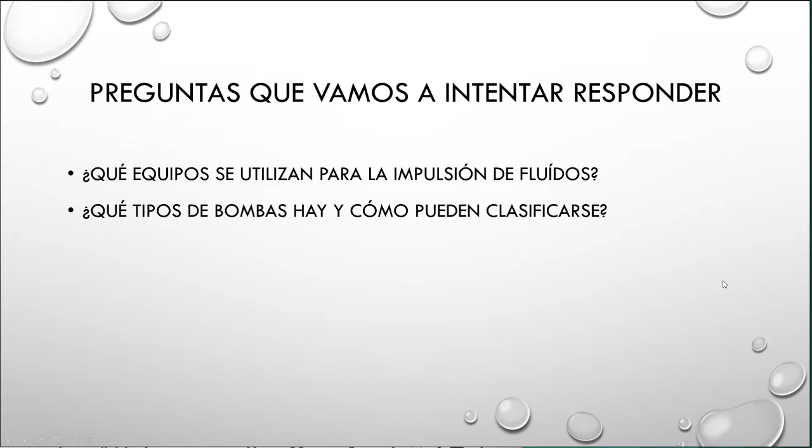La impulsión de fluidos se realiza a través de una bomba, que básicamente es una máquina que absorbe energía mecánica proveniente de un motor eléctrico o térmico y luego la transfiere a un fluido como energía hidráulica, lo que permite que este fluido pueda ser transportado de un lugar a otro, ya sea a distintas presiones manteniendo el mismo nivel, o bien a diferentes niveles o a diferentes velocidades.

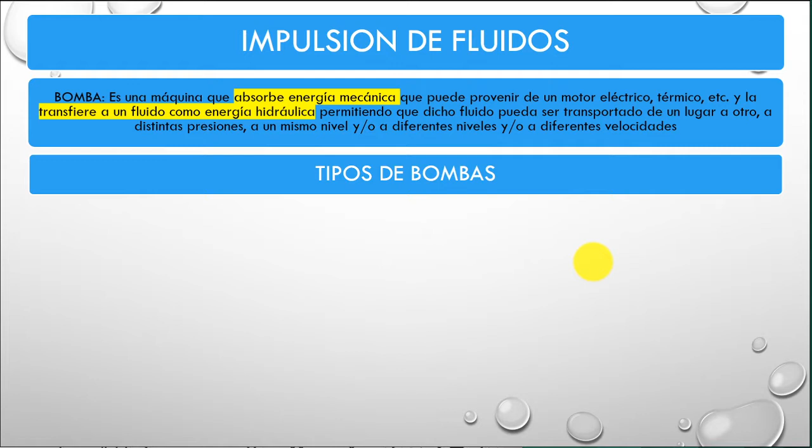Dentro de los tipos de bombas podemos encontrar dos grandes grupos: por un lado las bombas dinámicas, y por otro lado las bombas de tipo desplazamiento positivo. Estas dos grandes clasificaciones de bombas presentan formas de operar completamente distintas.

Por un lado, las bombas dinámicas suministran un caudal que va a depender de la presión de la descarga o de la energía suministrada, mientras que las de desplazamiento positivo entregan un caudal fijo, solamente dependiente de la revolución o las carreras que tenga el equipo. Cuando veamos en detalle el principio de funcionamiento, vamos a entender bien por qué no depende el caudal entregado de la contrapresión en el sistema.

Dentro de las bombas dinámicas tenemos otros dos tipos de bombas de acuerdo a su principio de funcionamiento, que son las bombas centrífugas y las bombas periféricas. Dentro de las de desplazamiento positivo tenemos otros dos grandes grupos: bombas alternativas o bombas rotativas.

Vamos a ver un video donde se describe en detalle el principio de funcionamiento de las bombas centrífugas.

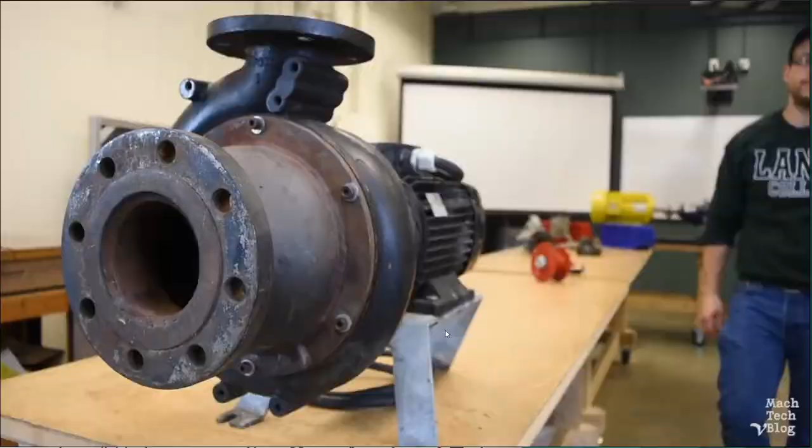Hi, I'm Adam. This is the Mach Tech video blog, and today I'd like to talk a little bit about centrifugal pumps.

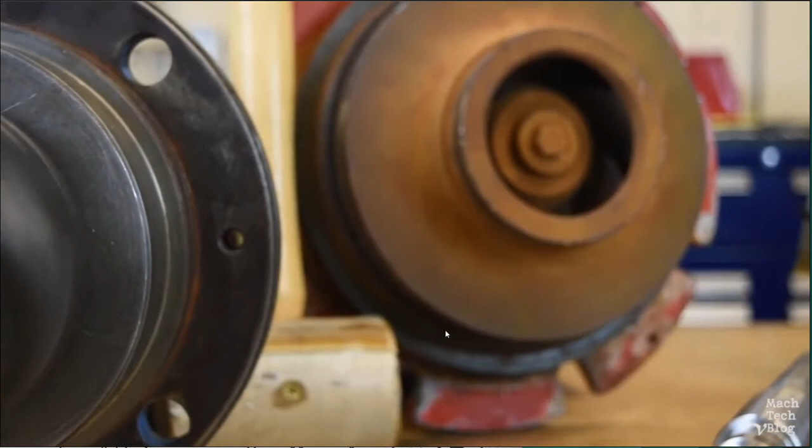Centrifugal pumps are definitely one of the most common machines in the industrial landscape. In fact, they're second in number only to electric motors. And when you consider that electric motors are used to drive centrifugal pumps, it's safe to say that the lion's share of energy usage in the world goes towards pumping fluids with centrifugal pumps. So if you're an industrial maintenance technician, mechanic, or machinist, you'll come across these machines at some point in your career, so it would do you some good to know how they work in the first place.

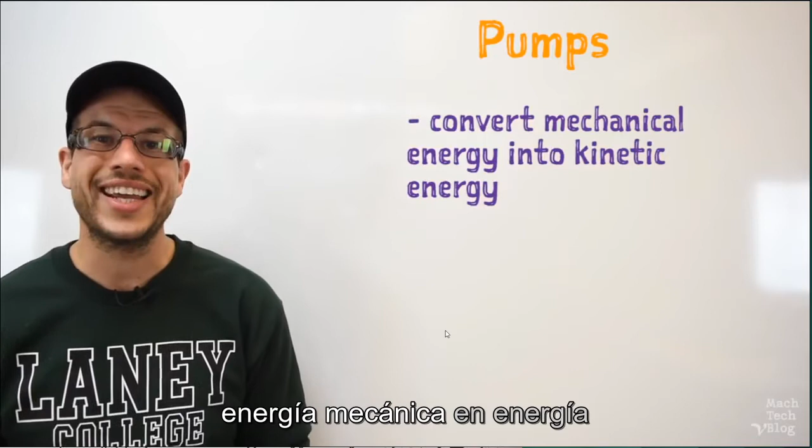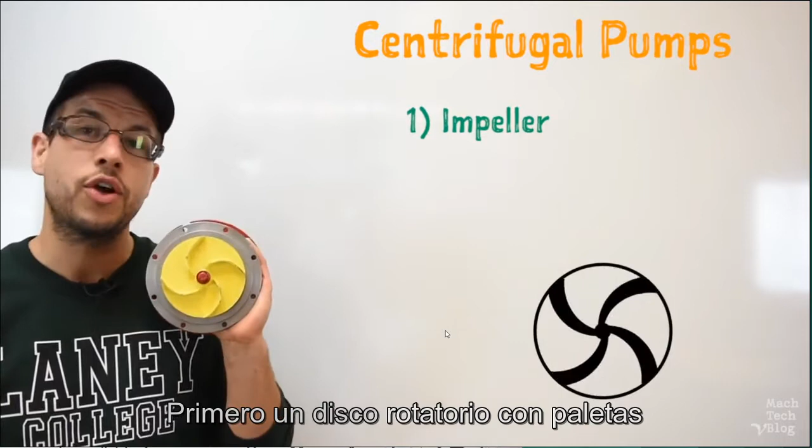In general, a pump is a machine which converts mechanical energy into the kinetic energy of a pumped fluid for the purpose of transporting that fluid from one point to another. But in order to be classified as a centrifugal pump, a pump needs to have two unique components. The first is a rotating disc with curved blade-like vanes on it called an impeller. The second is a specially shaped pipe called a volute casing, which contains the impeller and the pumped fluid.

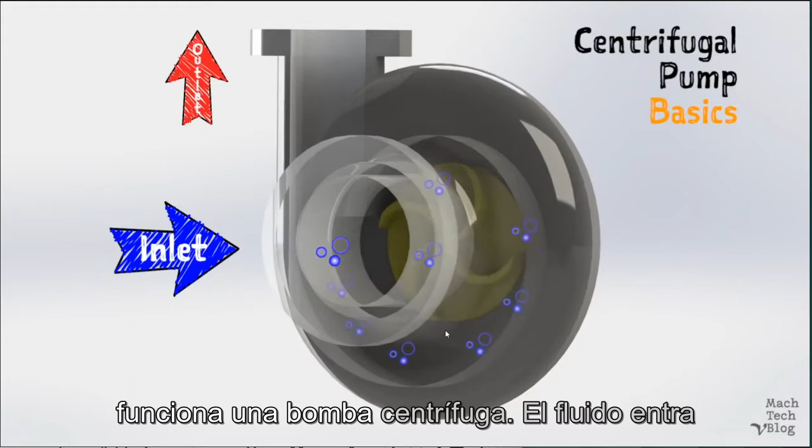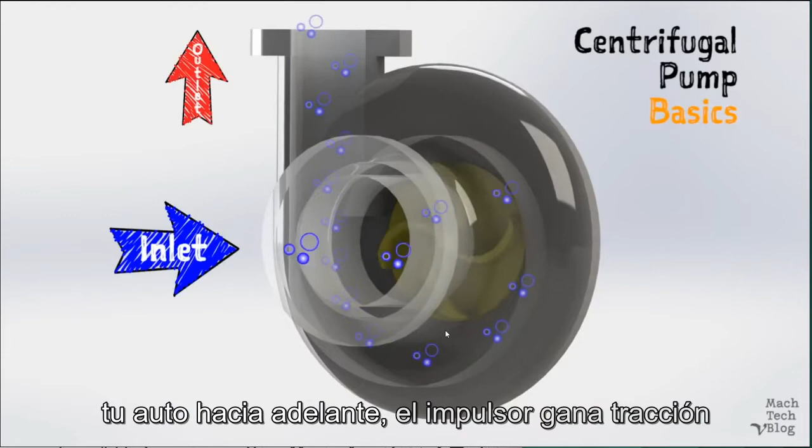In the most basic sense, here's how a centrifugal pump works. Fluid enters the pump at the center of the impeller, called the suction eye. Friction between the fluid and the surface of the rotating impeller causes the fluid to rotate. Think about it like this: just like the friction between the road and the rubber in your tires propels your car forward, the impeller gains traction on the fluid as it spins in contact with it.

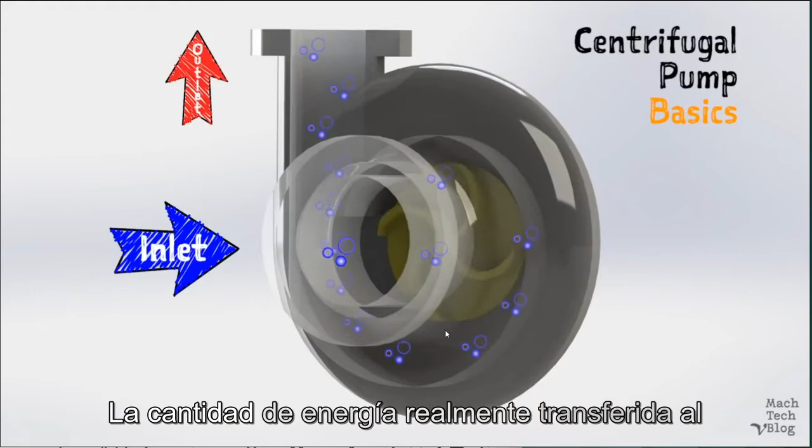The rotating fluid is thrown to the outside of the impeller by centrifugal force, a phenomenon which causes objects revolving around a center point to move away from the center. This is how the fluid picks up kinetic energy from the impeller, and this method of energy transfer by centrifugal force is why these pumps are called centrifugal pumps. The amount of energy actually added to the fluid is dependent on three factors: the density of the fluid itself, the impeller's speed of rotation, and the impeller's diameter.

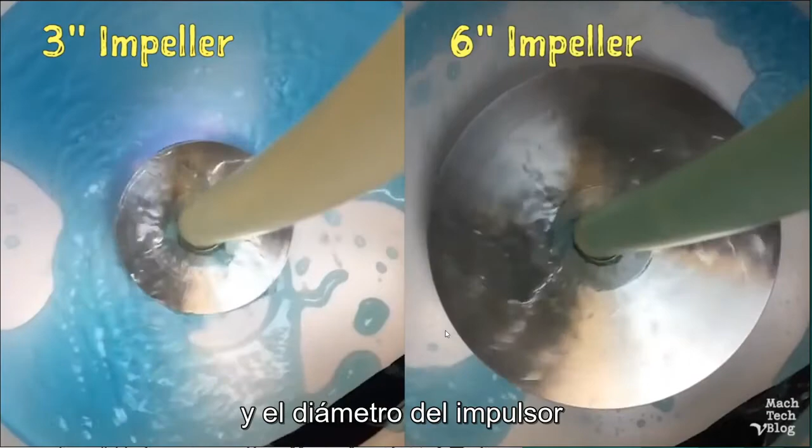From the impeller, the fluid is released into the chamber of the volute casing and directed around to the discharge outlet, and ultimately into the system.

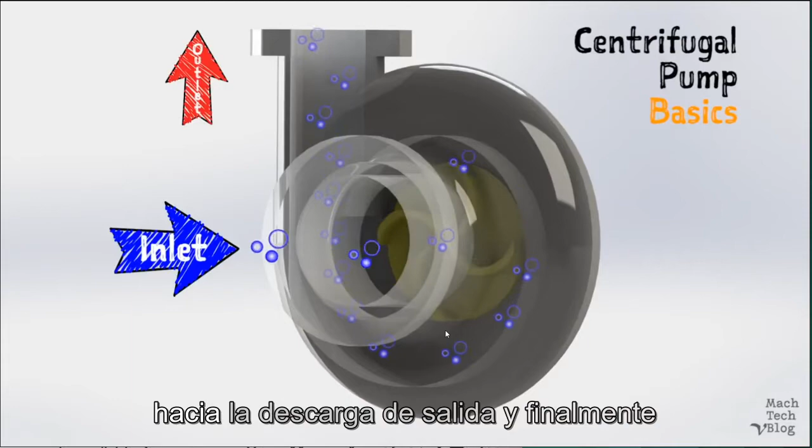Let me take a minute to set the record straight. A very, very common misconception is that these curved vanes help to move fluid by cupping it and pushing it through the pump. So then the correct direction of rotation for this impeller would be clockwise, right?

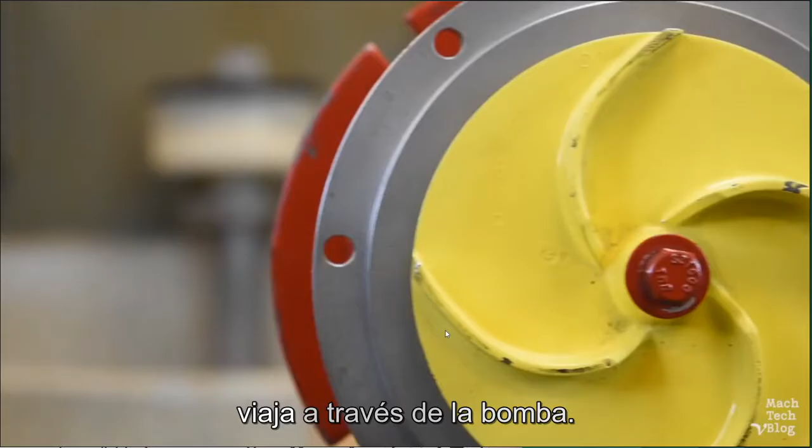That's not really what the vanes are there for. The vane's purpose is to conduct the fluid along the smoothest possible path as it travels through the pump. Backwards curved vanes help stabilize flow conditions at high speeds and reduce demands on the motor.

The correct direction of rotation for this impeller is actually counterclockwise, and you can always tell the correct direction of rotation of an impeller just by looking at the way the vanes are curved. It's important to add that because of the way centrifugal pumps impart energy to fluid, the impeller must always be fully submerged and in direct contact with the pumped fluid.

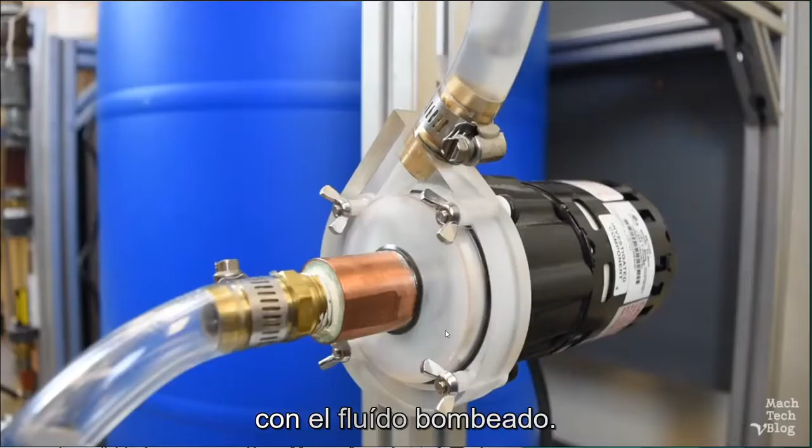As we can see from this little light-duty pump, a centrifugal pump will not pump air and it will not suck fluid through piping like a straw. So before the pump is turned on, the casing must be flooded with fluid, a process known as priming.

And during operation, there must be a sufficient amount of available fluid under positive pressure at the suction inlet of the pump to replace the fluid which is being discharged. This is usually accomplished by placing the pump below the fluid level of the source tank.

If the pump is ever starved of fluid, certainly the pump's performance will be affected, but it's actually more serious than that. It's possible that the pressure at the suction eye of the impeller will drop below the vapor pressure of the pumped fluid. If that happens, then the fluid will effectively boil.

Little bubbles will form, travel partway through the impeller, and then collapse at supersonic speeds like little bullets, taking bits of the impeller along with it. This is a condition known as cavitation, and a pump that's experiencing cavitation is not long for this world.

I know that I use these little water bubbles in my animations to illustrate the fluid path through the pump, but actually, that kind of entrained air or any other gas is the worst case scenario for a centrifugal pump.

Let's talk about the volute casing. Volute refers to the shape of the casing. A volute is a geometric shape defined as a spiral with an ever-increasing radius, like a snail shell.

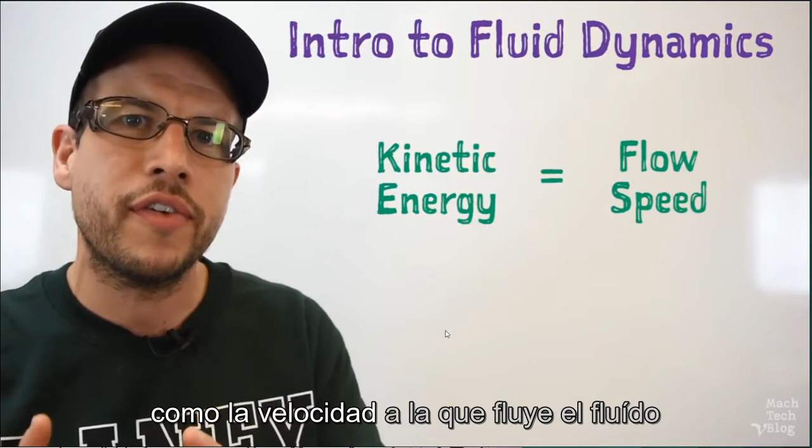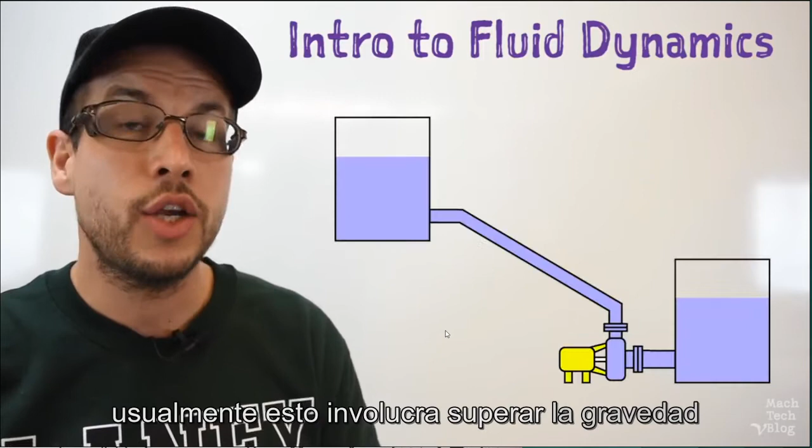But flow speed is only half the equation. A pump also needs to be able to develop sufficient pressure to meet the requirements of the system. Usually this involves overcoming gravity by raising fluid from a lower elevation to a higher elevation and overcoming the resistance or friction of the pipes which conduct the fluid.

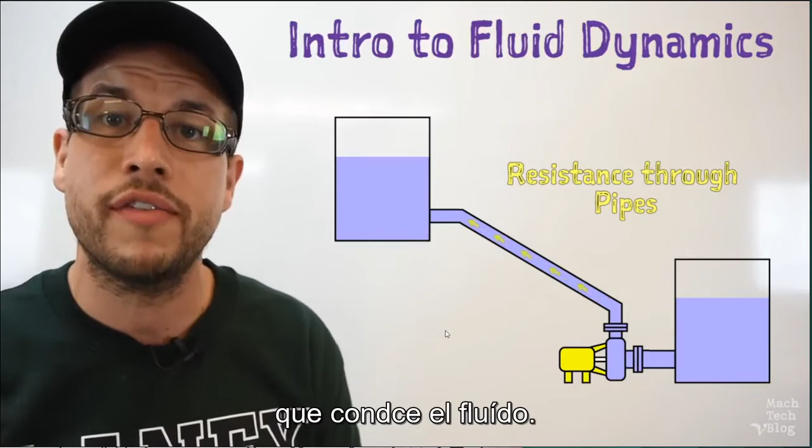Think of pressure as the ability to accomplish a task, and flow speed as how quickly the task can be accomplished. To build pressure, the pump has to do some science magic to convert kinetic energy into pressure energy.

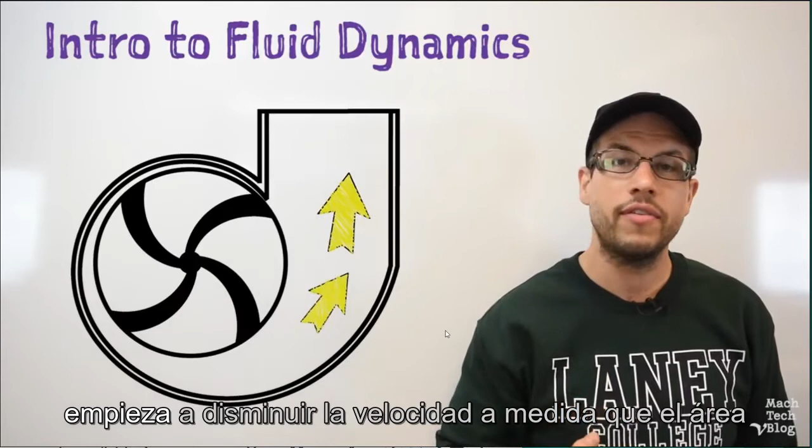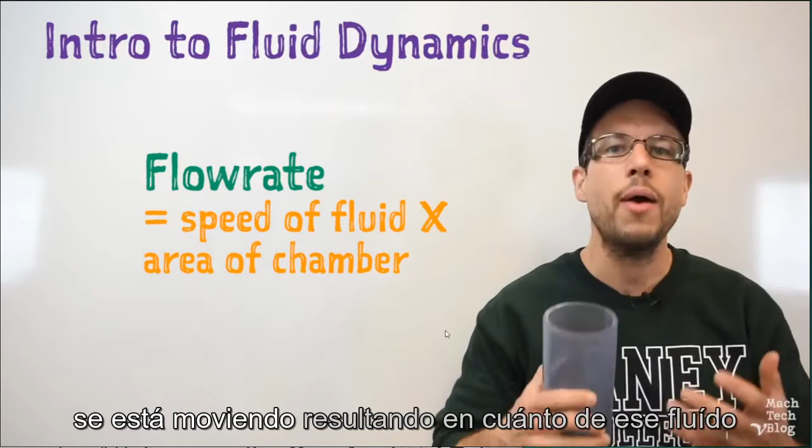As fluid travels through the volute chamber, it actually starts to slow down as the area of the volute chamber increases. That's because flow rate, or the amount of fluid which is moved during a given length of time, is dependent on two factors. One is the speed of the fluid, and the other is the size of the chamber through which it's moving, meaning how much of the fluid is moving at that speed.

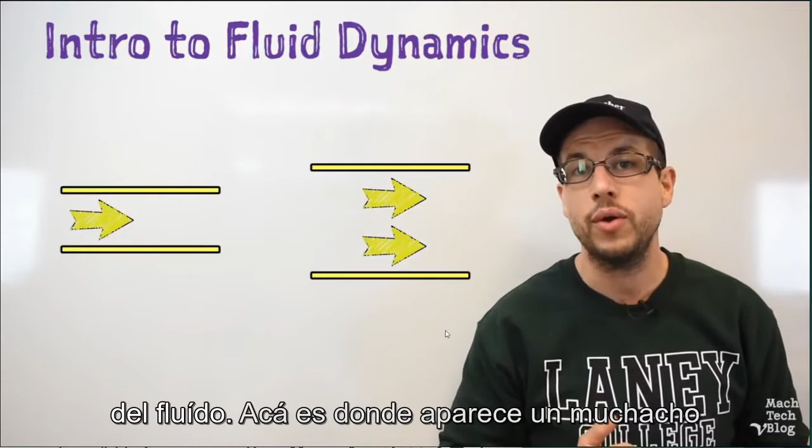If the flow rate is constant, then an increase in the size of the chamber would result in a corresponding decrease in the speed of the fluid. This is where a guy by the name of Daniel Bernoulli comes in.

He discovered 300 years ago that there's an inverse relationship between a fluid's velocity, or speed, and its pressure. Meaning that if the velocity goes up, then the pressure comes down, and if the velocity goes down, then the pressure automatically goes up.

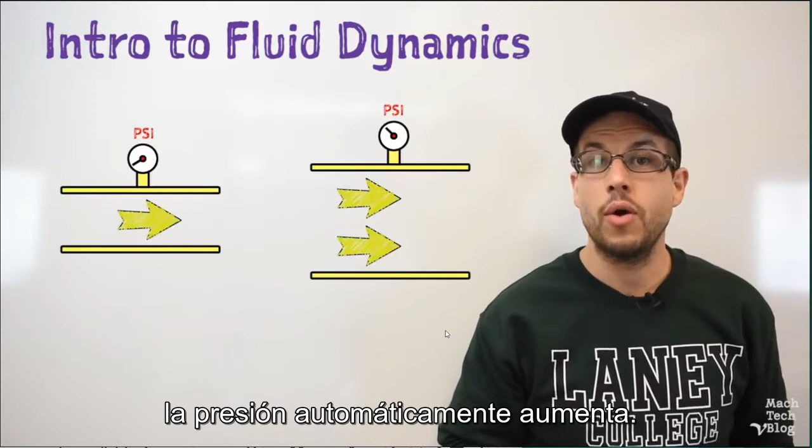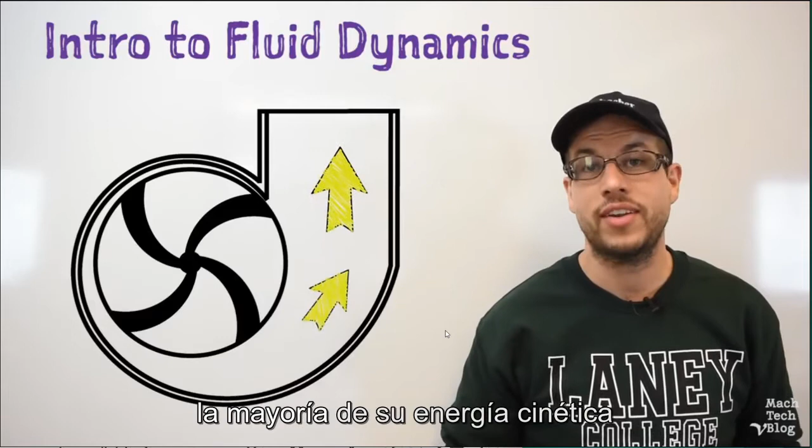So as the fluid is slowing down in the ever-expanding volute chamber, it's also picking up pressure, so that by the time the fluid reaches the discharge outlet, a great deal of its kinetic energy has been transformed into pressure energy. I think that's a pretty amazing little trick.

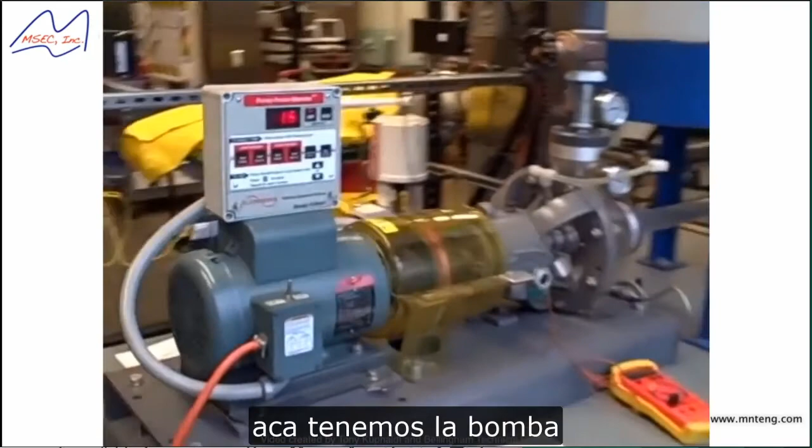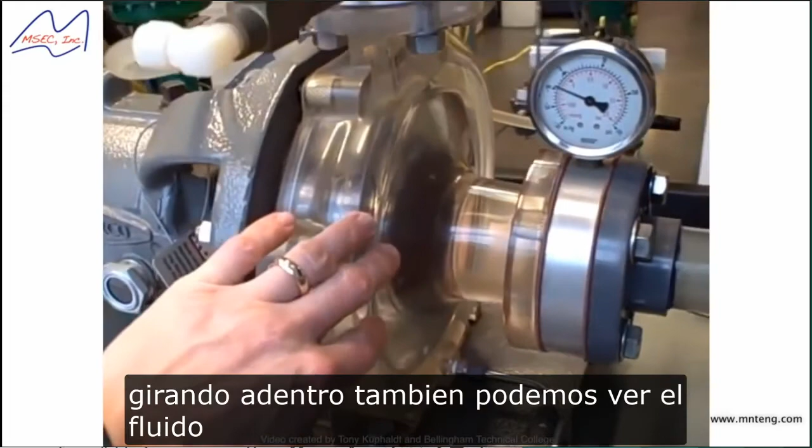Here we have a pump trainer. We have an electric motor with a horsepower meter through a magnetic coupling to a centrifugal pump. The pump itself is made of acrylic, so we can see the spinning impeller inside. We can also see the fluid go through. It's got a gate valve here on the discharge.

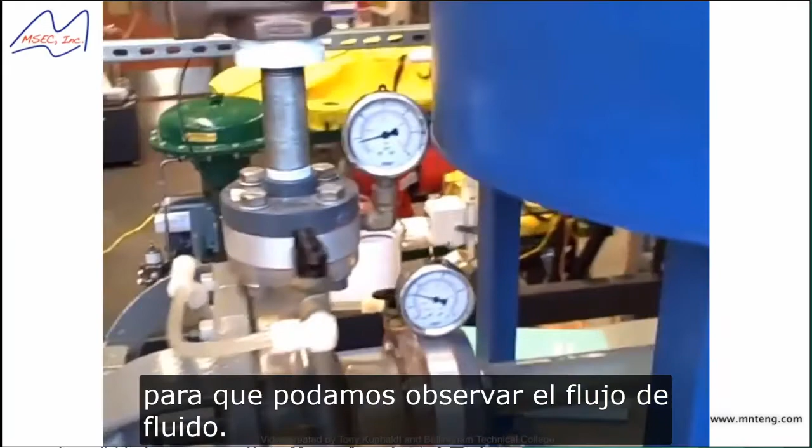It's got another valve over here on the suction, and all the piping here is clear, so we can watch the flow of fluid. Right now it's all clear water, so we can't see much in that regard. It's got a rotameter here showing us the amount of flow. But what I'm going to demonstrate here is cavitation.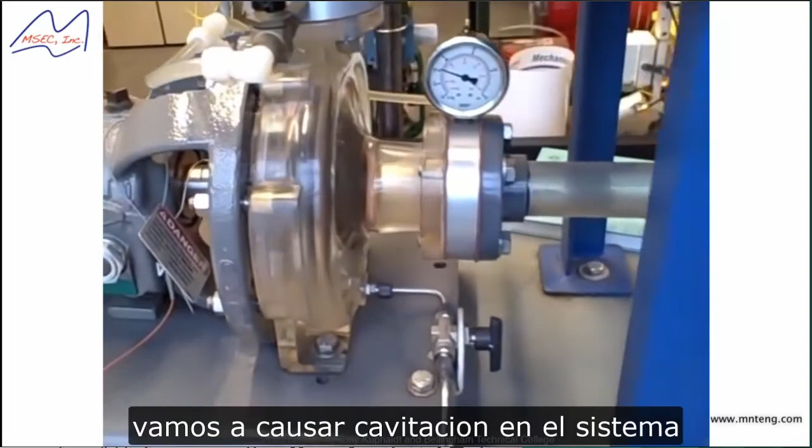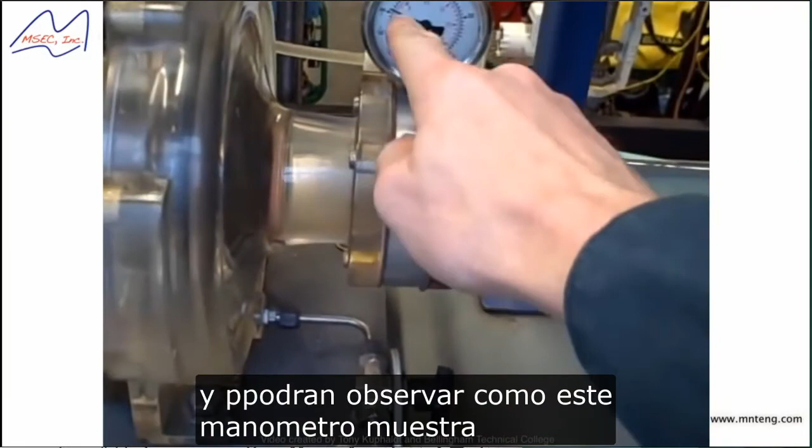We're going to purposely cause cavitation to occur in the system. We're going to do so by keeping the discharge valve wide open like it is and pinching off the suction valve. What that will do is reduce the pressure in this line, and you'll see this compound gauge show a stronger and stronger vacuum as we begin to pinch off this valve.

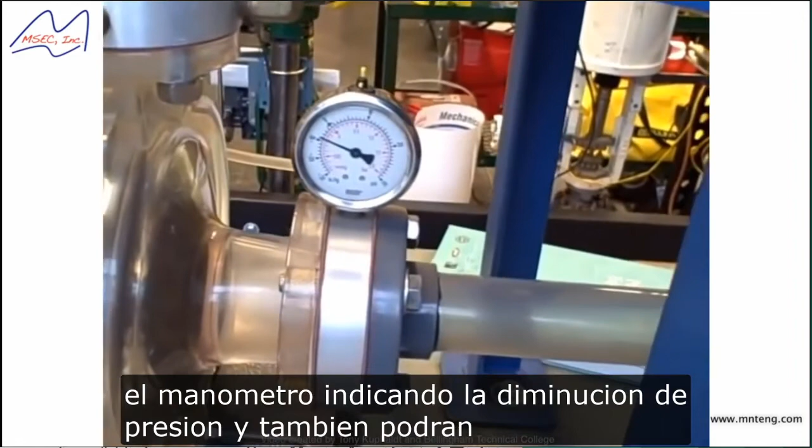Now I'll start to turn this clockwise, and you will see the gauge's indication go down. You'll also begin to hear cavitation take effect, and we'll be able to see the bubbles form inside of here as it cavitates after it flashes into vapor and cavitates into liquid again here. So here we go, closing the valve.

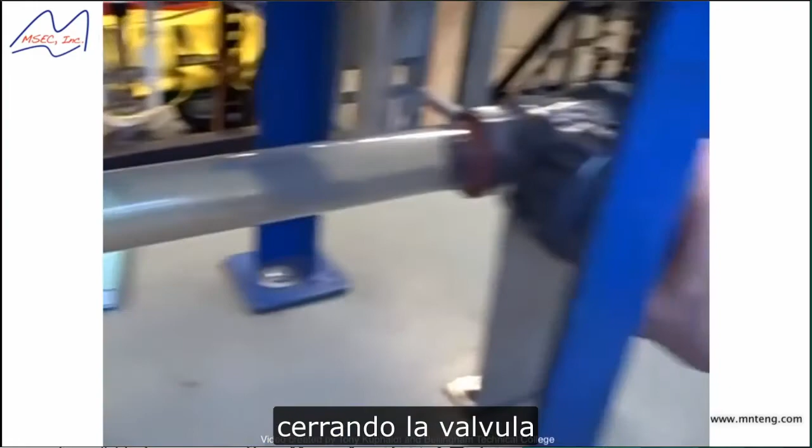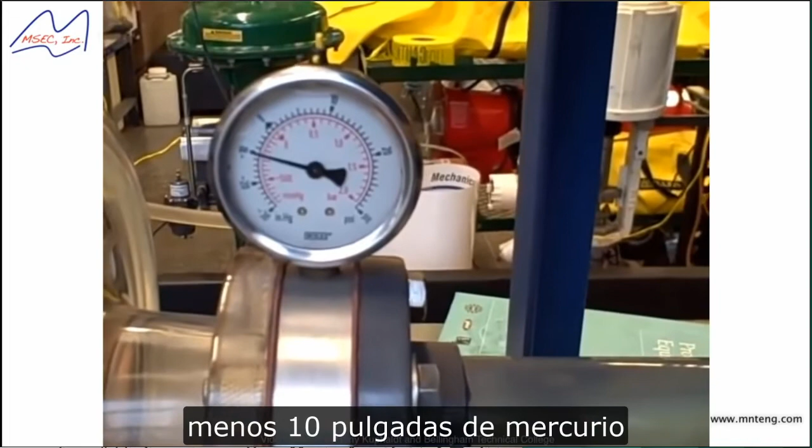And watching the gauge, the gauge will go down. Minus 10 inches of mercury. Minus 12, minus 14, you can start to hear flashing occur there.

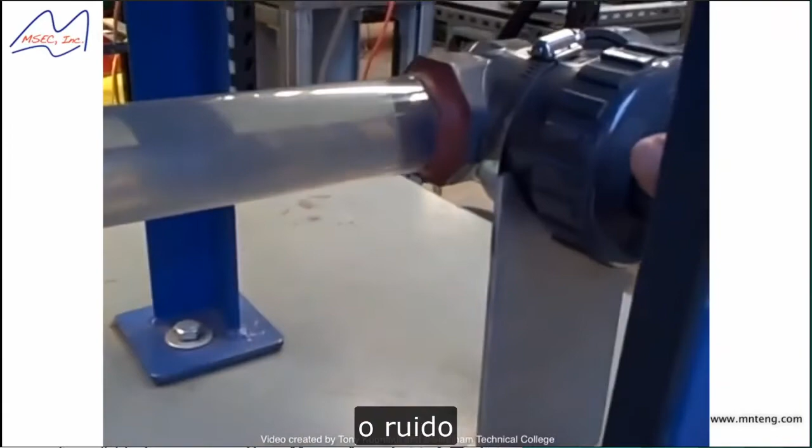Minus 16, more noise. Minus 18, minus 20. You start to hear that sound that sounds almost like rocks going through the pipe.

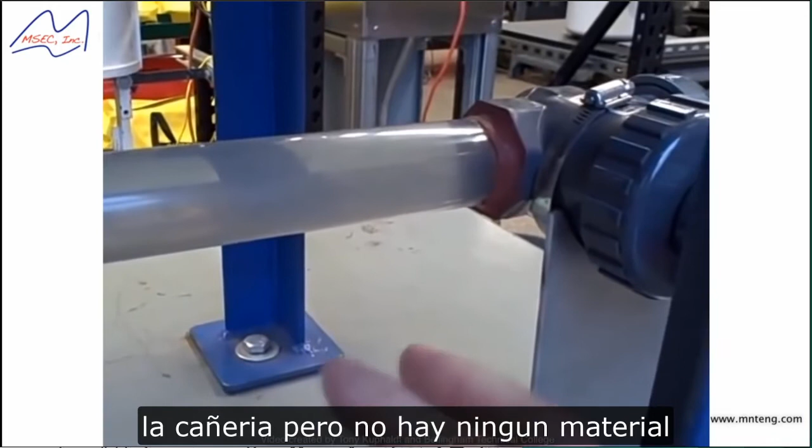There's no debris, there's no solid material through here. That solid sounding sound is really the collapsing of the vapor bubbles as they go back into liquid form. You can really hear it now. You can see it occur inside of here. It's a very pronounced action and noise.

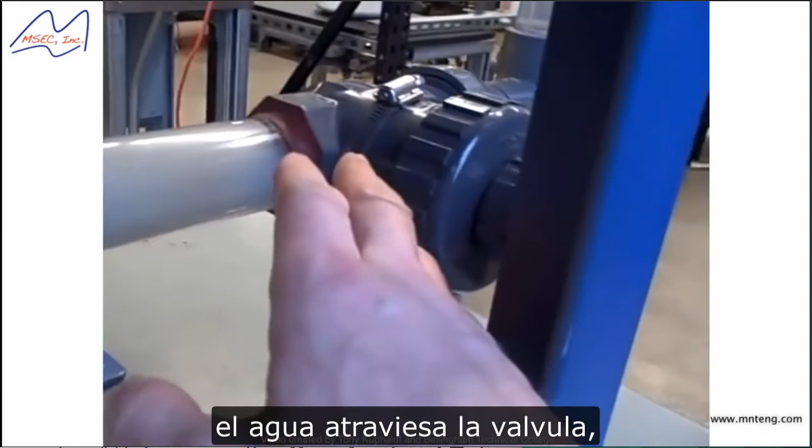As the water goes through the valve, it reduces pressure going through the restricted valve. Its pressure drops below the vapor point of the water at this temperature. It flashes into steam, and then after it comes out of the valve and expands again, the pressure goes up. And what happens is those vapor bubbles collapse back into liquid. And that's when we get the cavitation effect.

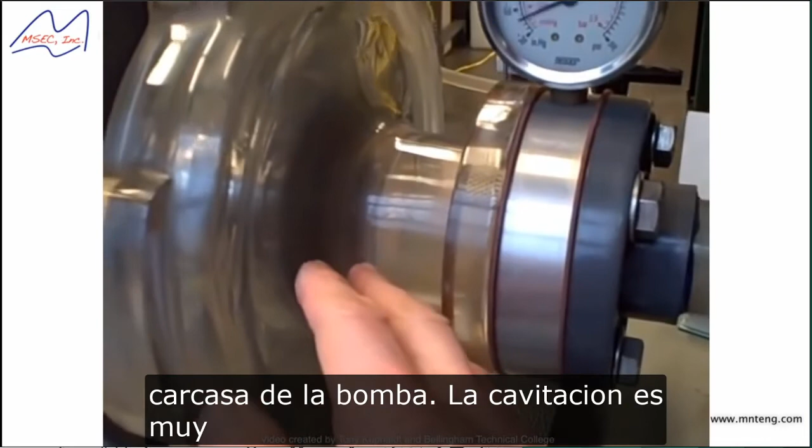See it happening here. We can also see some bubbles here in the scroll casing of the pump. Cavitation is very destructive, especially upon metal surfaces. The acrylic surfaces here seem to handle it a little bit better, but with metal surfaces, there's no give, and it's very destructive. The metal will become pitted by the high pressure jets formed by the collapsing bubbles.

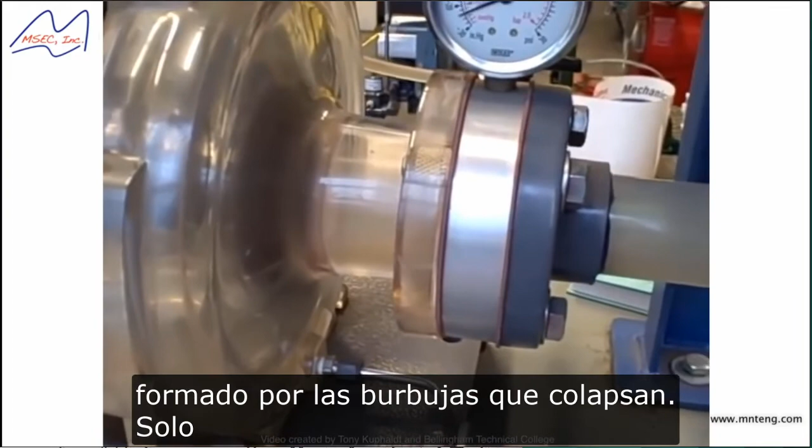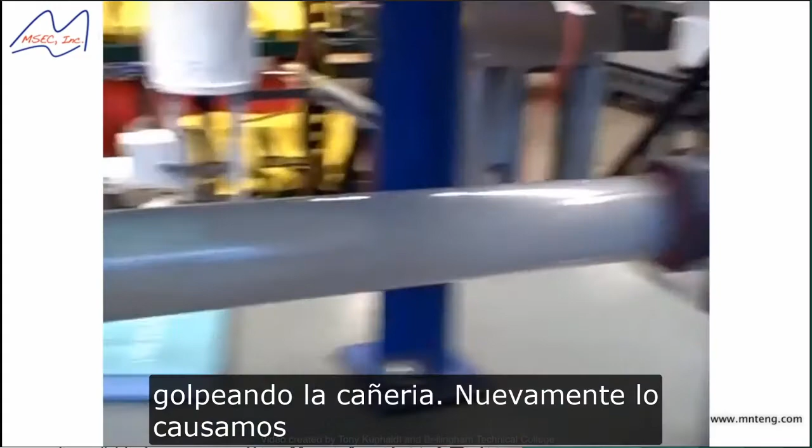So I just want to illustrate what cavitation looks like in an acrylic tube and what it sounds like. It sounds like rocks, literally like rocks going through the pipe. And again, we cause it by dropping too low of a pressure, causing flashing to occur, and when the pressure rises again, the bubbles collapse, and that's when cavitation occurs.

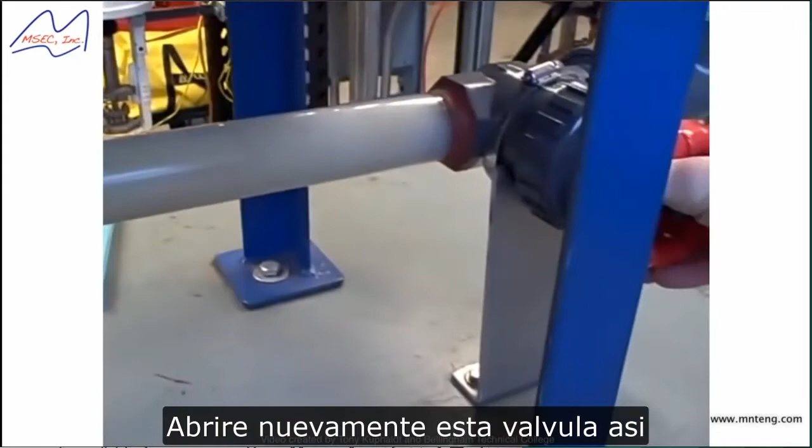I will open this valve back up. That increases the pressure on the suction side of the pump, less and less vacuum, until we no longer flash and we no longer cavitate. And that's a happy pump.

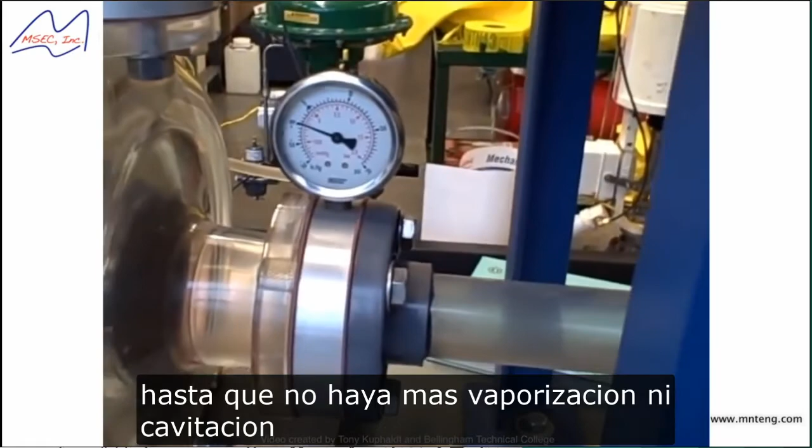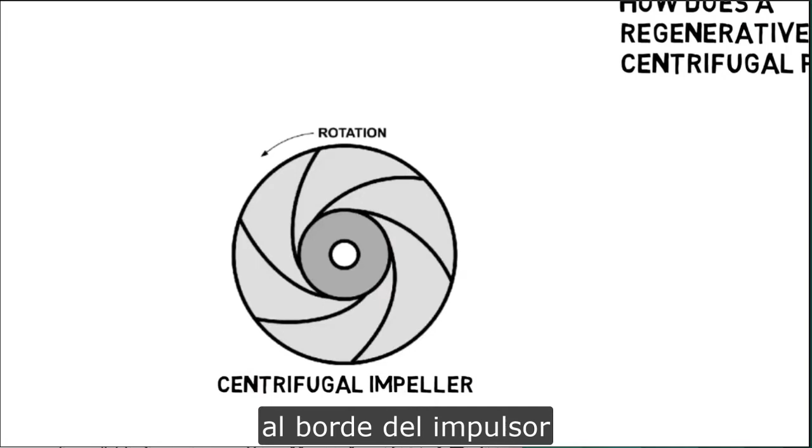The main difference between a regenerative turbine pump and a centrifugal pump is in the impeller. A standard centrifugal impeller has curved vanes that extend from the center to the edge of the impeller. The regenerative turbine impeller has rows of vanes on each side of the impeller's rim.

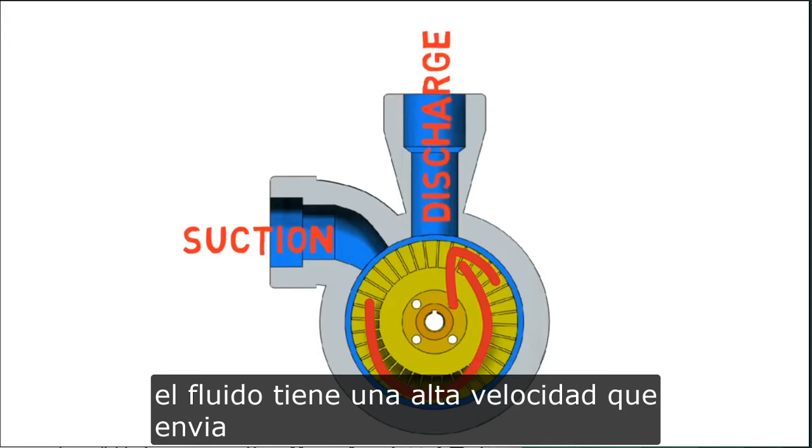On the suction side, liquid is gathered by the impeller's vanes. After making only one revolution in the annular channel, the fluid has a high velocity that sends the liquid out the discharge. Liquid entering a centrifugal pump's impeller can pass between the vanes only once. Energy is added to the liquid as it travels from the center of the impeller to the rim.

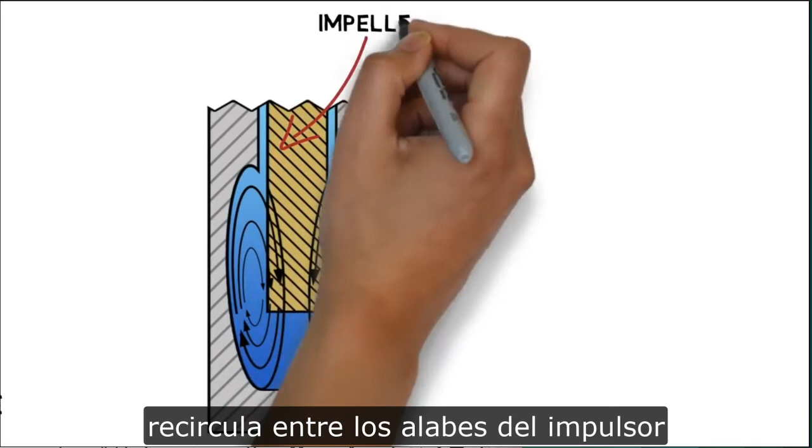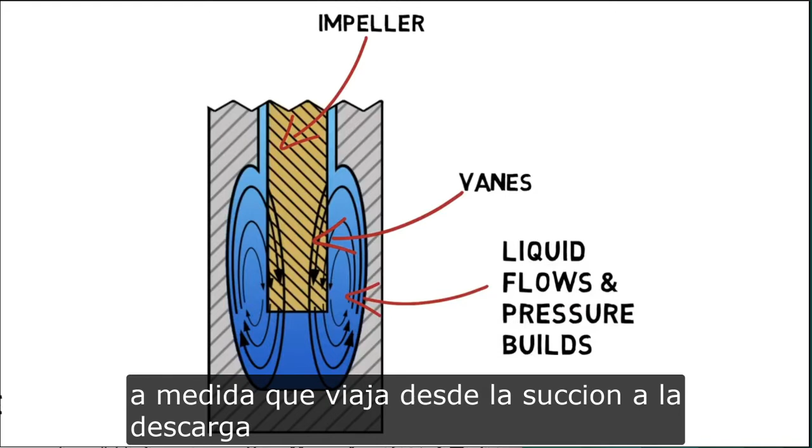In a regenerative turbine pump, liquid recirculates between the impeller's vanes. This helical action carries the liquid forward. Energy is added to the liquid in a number of impulses by the impeller's vanes as it travels from suction to discharge as the liquid builds pressure.

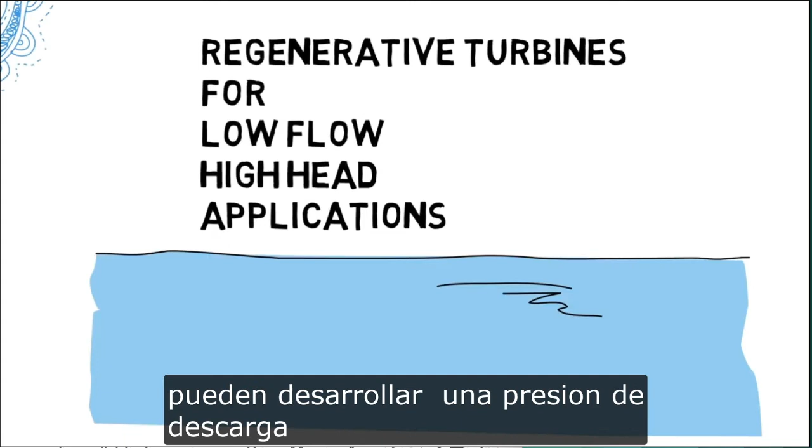For low-flow, high-head applications, regenerative turbine pumps offer better efficiency than centrifugal pumps and can develop several times the discharge pressure of a centrifugal pump having an equally sized impeller.

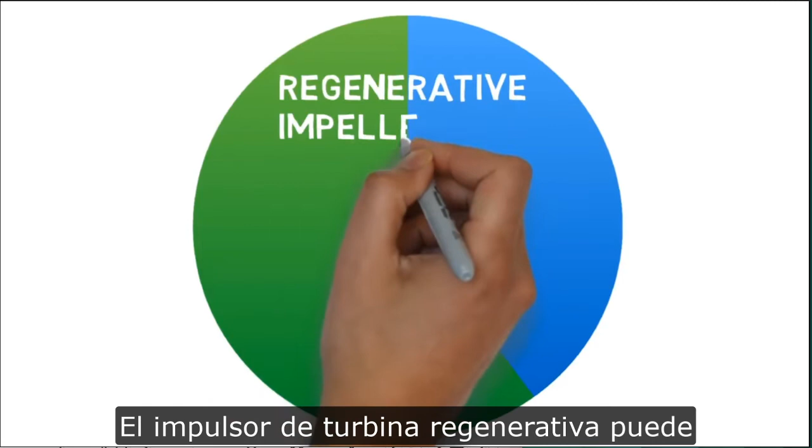The regenerative turbine impeller can pump fluid with up to 20% entrained gases without damage from cavitation or any performance loss.

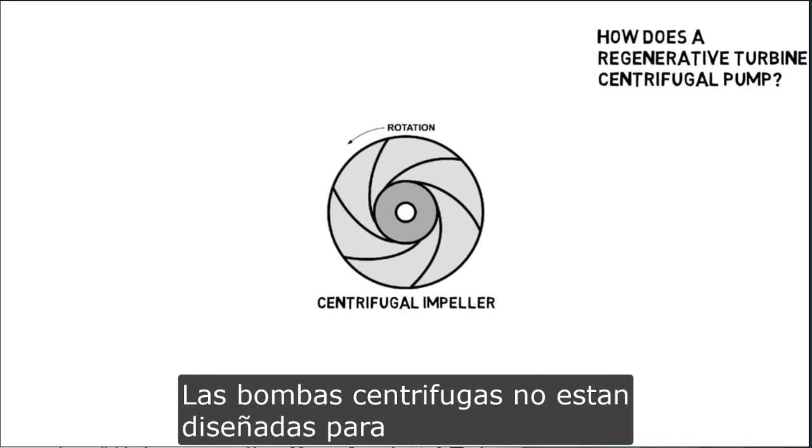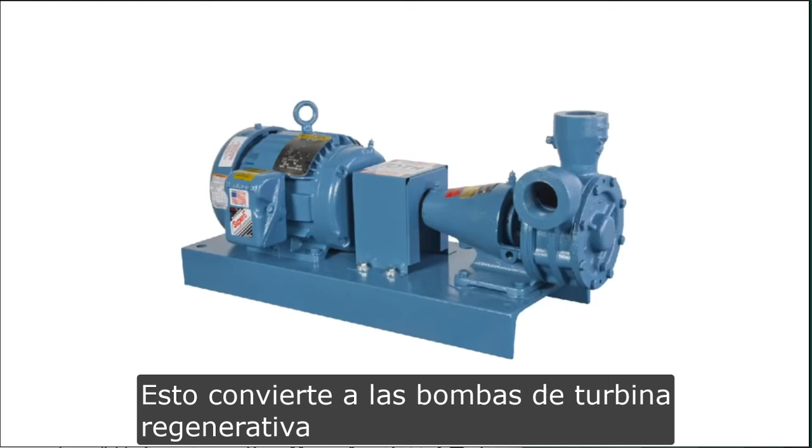Centrifugal pumps are not designed to handle gas in a liquid. Gas in a centrifugal pump can create a significant loss in performance, causing fluctuating flow, discharge pressure, and unnecessary wear and vibration of the centrifugal pump's internal components. This makes a regenerative turbine pump a great solution where cavitation is a concern.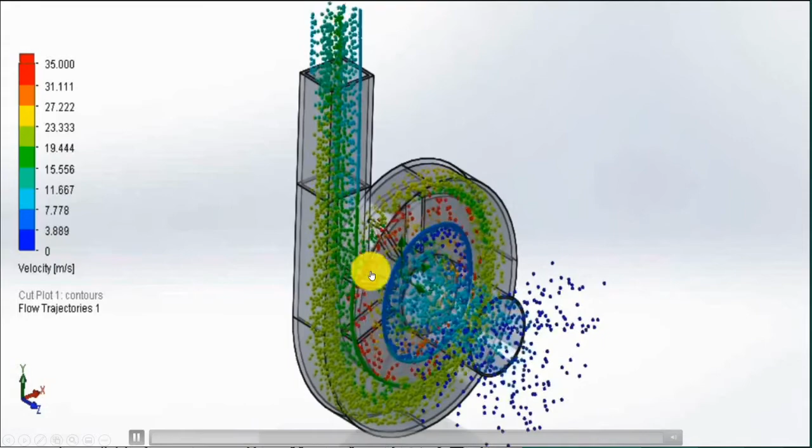Acá se ve mejor el recorrido, acá desde otro corte de la bomba. El fluido ingresa lentamente al ojo del impulsor, luego es acelerado y luego nuevamente frenado por el cambio de sección en la caja voluta para transformar toda la energía cinética en energía de presión.

En cambio, en este video vamos a ver las líneas de corriente dentro de una bomba periférica. Observar que el comportamiento es totalmente distinto. En principio acá no se ingresa por el ojo del impulsor, sino que directamente el fluido ingresa por la periferia y la velocidad es continuamente creciente. Ingresa con la mínima velocidad y a medida que es acelerado por ese impulsor girando a altas velocidades y generando turbulencia, toda la forma de transmitir energía es a través de la aceleración del fluido por la turbulencia generada.

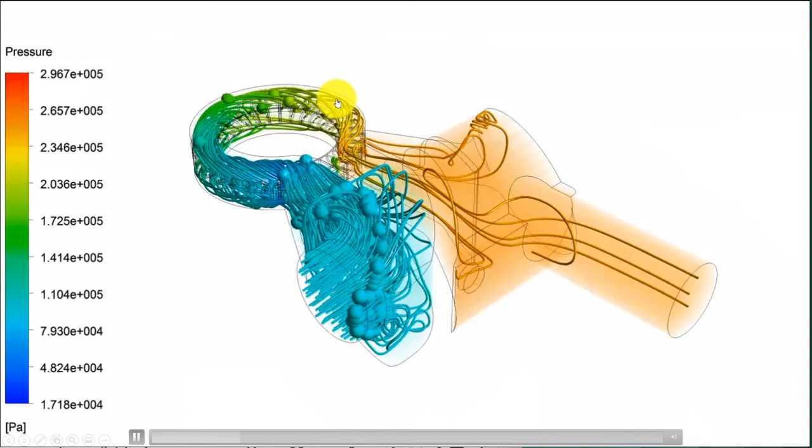Por último, para completar el cuadro, nos queda describir las diferencias entre los dos grandes grupos de bombas de desplazamiento positivo, las alternativas y las rotativas. Por su parte, las bombas de desplazamiento positivo de tipo alternativas utilizan una serie de elementos de volumen que se expanden y contraen, complementados por válvulas de retención que permiten la admisión y el egreso del fluido.

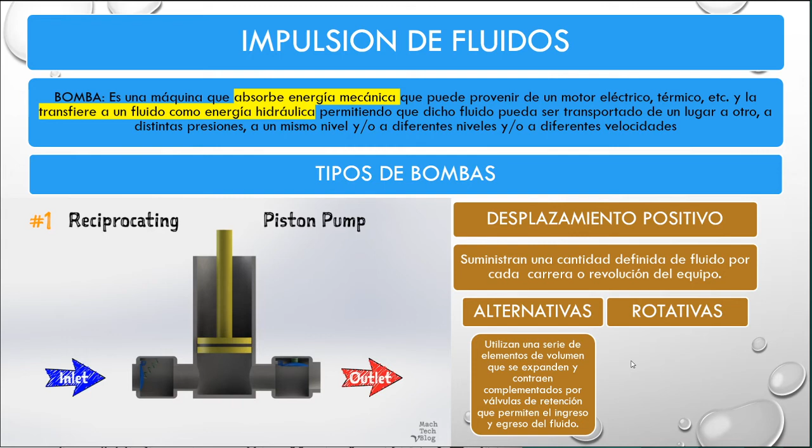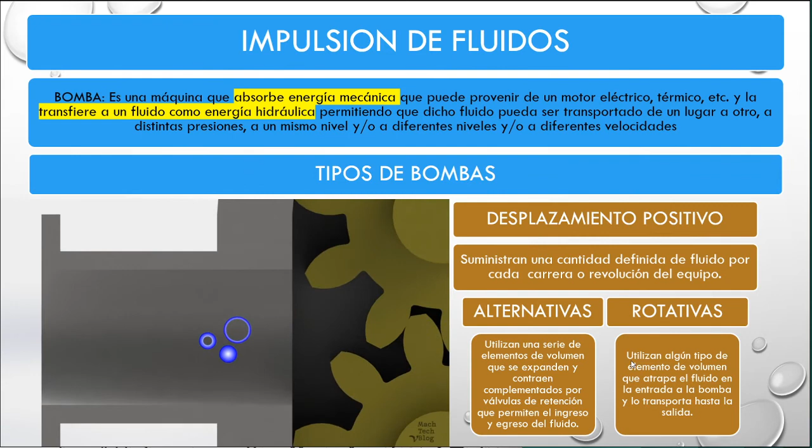Van a ser, imagínense, como una especie de émbolo de una jeringa, que al expandirse a través de una serie de válvulas permiten el ingreso y luego al contraerse expulsan el fluido en la descarga. Por su parte, las bombas de desplazamiento positivo de tipo rotativas lo que hacen es utilizar algún tipo de elemento de volumen que permite atrapar el fluido en la entrada y transportarlo hasta la salida.

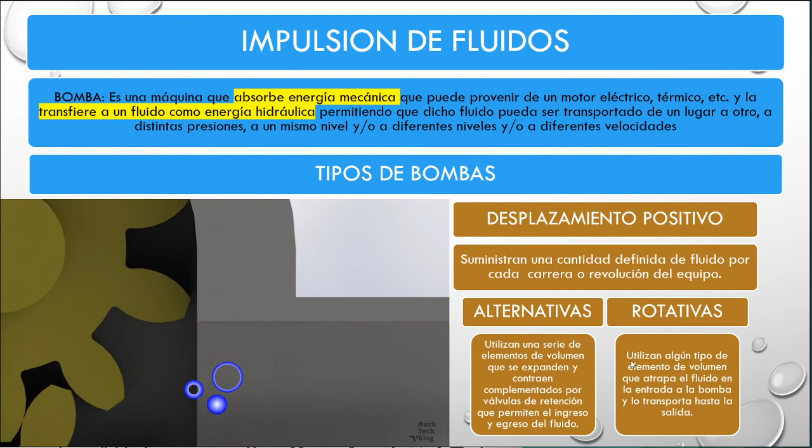No se preocupen que esto lo vamos a ver en mucho mayor detalle cuando veamos en un video el principio de funcionamiento detallado de este tipo de bombas.

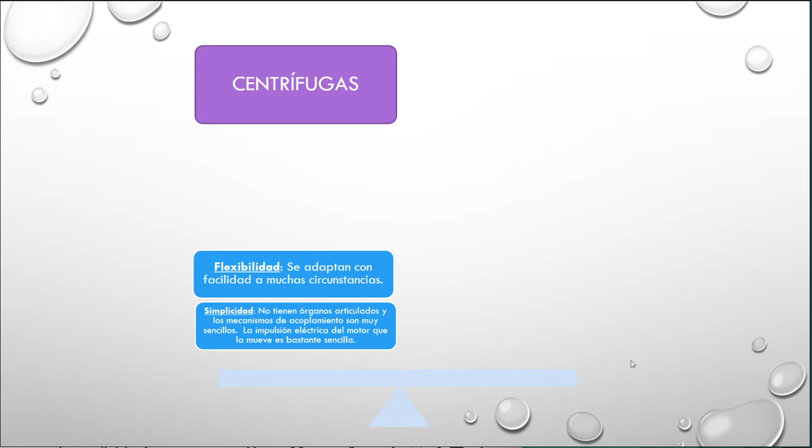Como para cerrar estas descripciones generales, vamos a hacer una comparación entre las bombas centrífugas y las bombas de desplazamiento positivo. Por su parte, las bombas centrífugas, una de las principales características o ventajas que tienen es su simplicidad. Al no tener órganos articulados y sus mecanismos de acoplamiento son muy sencillos, hace que la impulsión eléctrica del motor sea bastante sencilla. Por su parte, tienen una altísima flexibilidad y se adaptan con facilidad a muchas circunstancias. Es por esto que, como vimos en el video de las bombas centrífugas, son el segundo equipo más visto en la industria después de los motores.

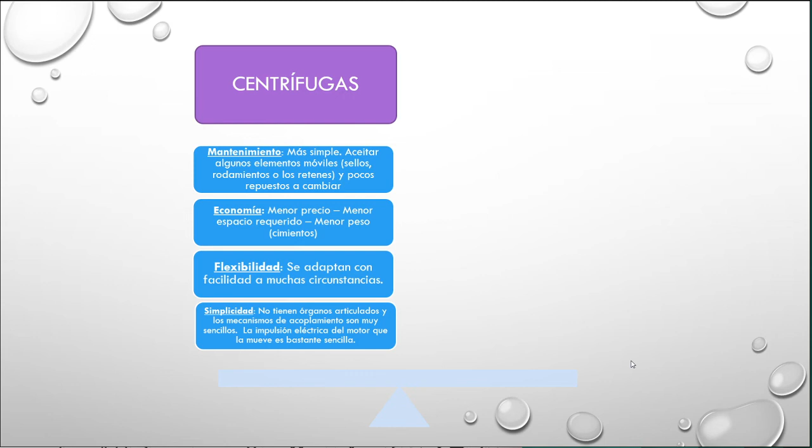Son económicas, son las que presentan menor precio, menor espacio requerido y son las menos pesadas, por lo tanto son las que menos exigencias de cimientos o bases tienen, lo cual todo se traduce en un ahorro de costos. Y por último, el mantenimiento es muy simple, básicamente consiste en mantener lubricados los elementos móviles como sellos, rodamientos o retenes y requieren de pocos repuestos a ser cambiados.

Por su parte, las bombas de desplazamiento positivo tienen la ventaja de que pueden desarrollar una presión mucho mayor que cualquier otro tipo de bomba. Son en particular efectivas con líquidos de alta viscosidad, incluyendo grasas, melazas, pinturas, caramelo. Pueden utilizarse para medir flujos, eso lo vamos a ver en más detalle en la unidad de medidores de caudal.

Y por último, hay determinados diseños o modelos que permiten aislar completamente el contacto de la bomba con el fluido impulsado, lo cual la torna muy útil para impulsar fluidos tipo corrosivos que en otras circunstancias generarían un gran deterioro de los elementos mecánicos.

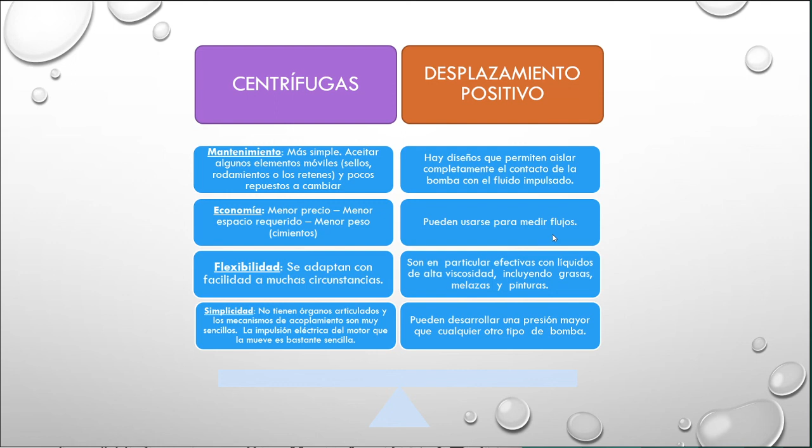Ya terminando este video, describimos los equipos que se utilizan para la impulsión de fluidos y dimos una descripción general de los distintos tipos de bombas y cómo pueden clasificarse. En los próximos videos vamos a ahondar en los detalles correspondientes a las bombas centrífugas y a las bombas de desplazamiento positivo.